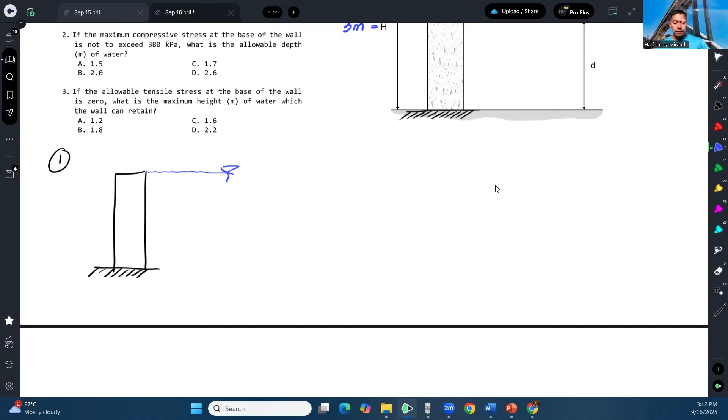Okay, and then we will assume a 1 meter strip of the wall, because typically the wall is long. So what we take is a 1 meter strip, which is the typical approach when analyzing retaining walls or dams.

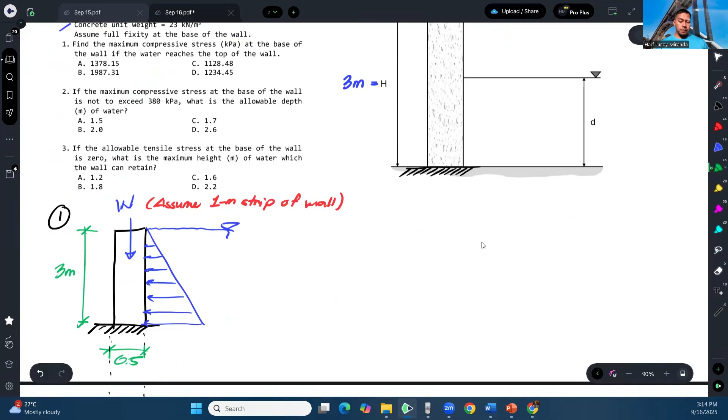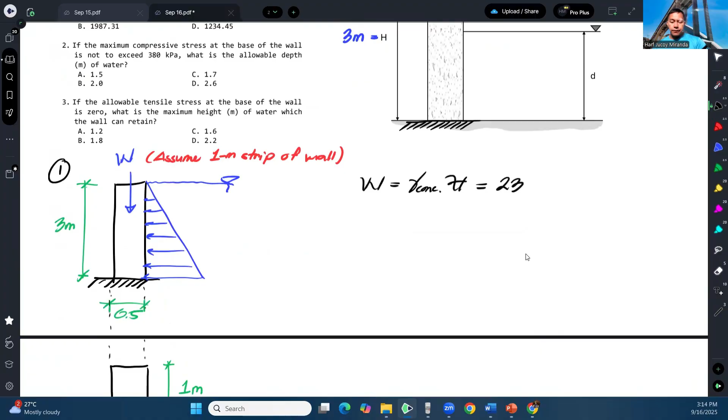So to compute the W, the weight, we're given gamma of concrete, right? So the weight, on the side here, is gamma of concrete times its volume, which is 23 times volume. So what is this volume?

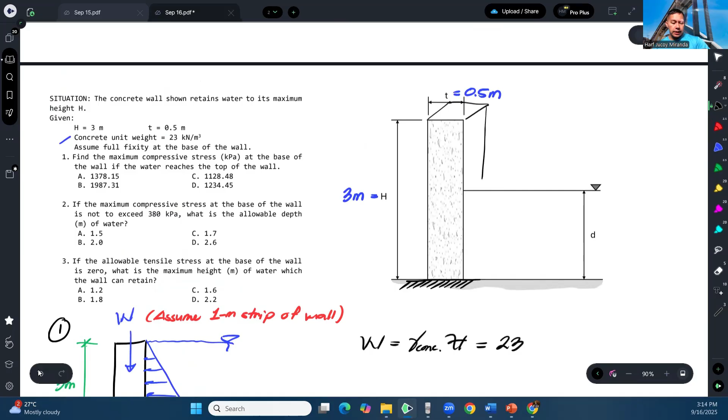It's simple actually, it's just like this: a solid rectangular shape, with a dimension here of 1 meter. So the volume is 3 by 0.5 by 1.

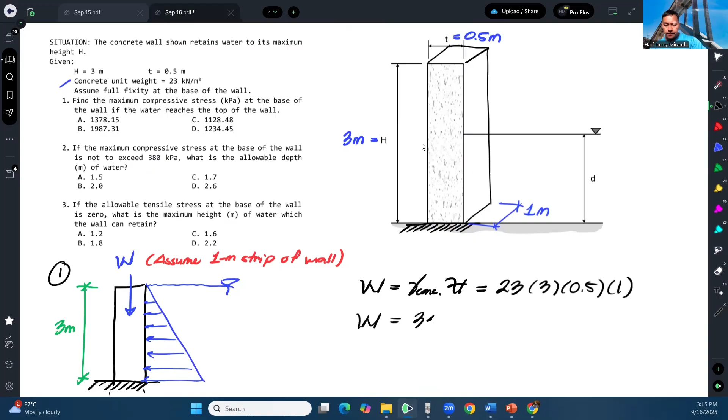That gives us 34.5 kilonewtons. As for the hydrostatic force, of course this has a resultant, which will be a function of the depth, right? Our depth now is 3 meters.

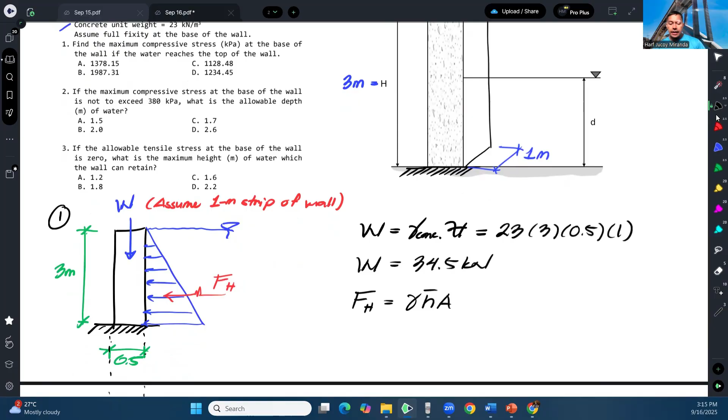So for our F, here you can use gamma water times H bar times A, or if you prefer, you can get the pressure at the bottom, which is just gamma times H, gamma times depth. In this case, H is the depth, and gamma of water is 9.81, with depth of 3 meters.

And then just get the area of the triangle. But if you want to do it this way, that's fine too. The gamma there is the gamma of water, and H bar is the distance to the centroid of the projection of the submerged shape, which in this case is rectangular.

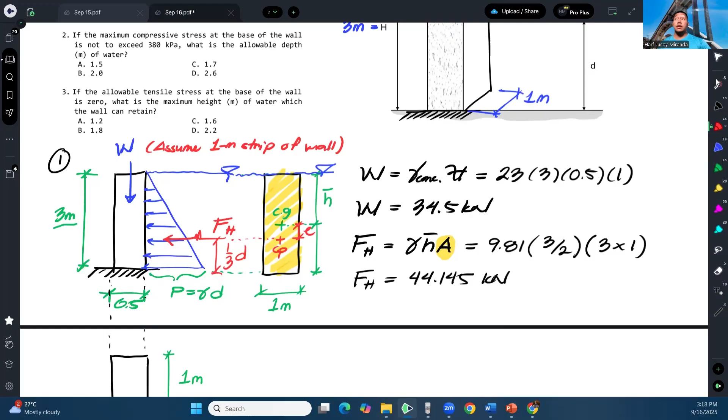So anyway, let's compute the question asked: compressive stress at the base of the wall. So again, let's go to the base, at the base. Let's say this is the base of the wall.

And as mentioned, fixed support.

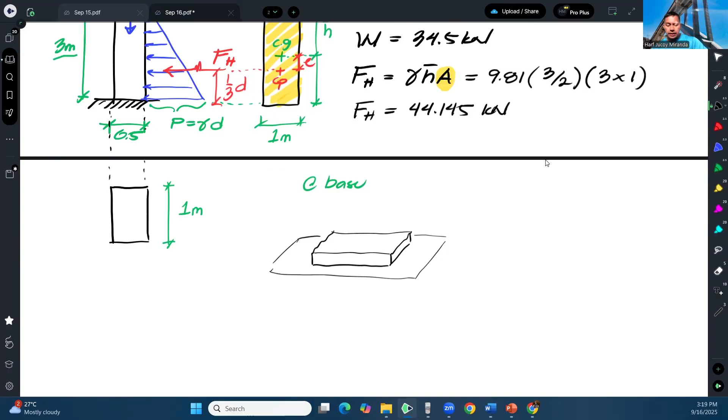Yan yung base. So because of the weight, meron dito reaction. And because of the force, meron din dito reaction. And maliban dyan, meron din ganitong reaction, kasi fixed support yan eh. So ito yung shear reaction, or wag ko lang gawing shear. Gawin ko lang to na Rx, tapos ito yung Ry, tapos ito moment reaction. Okay, so in this case, ito yun.

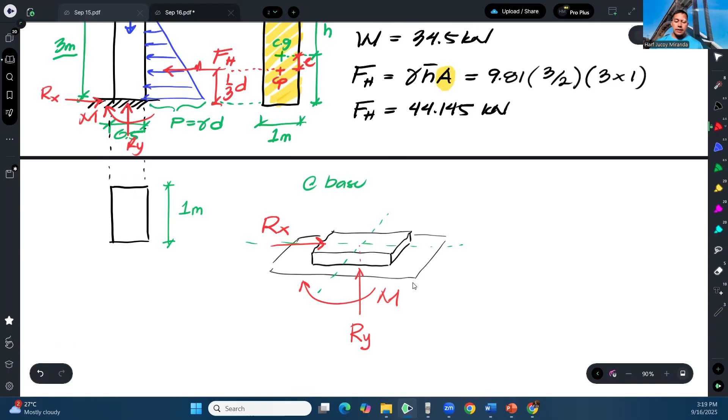Lagyan natin ng axis. Bali, meron tayong compressive reaction, Ry. Tapos meron din tayong moment reaction, M. And then meron tayong horizontal reaction, Rx. Okay, so ngayon, malinaw na in order for us to calculate the maximum compressive stress, combined axial and bending.

Ulit to. Okay, so ito will produce a compressive stress dun sa buong section na to. And ito namang bending moment will produce tension sa side na to, tapos will produce compression sa side na to. Kaya ang magiging itsura ng pressure diagram mo dyan, due to the combined axial and bending ay parang ganito.

So pwede na, again, pwede na ganito lang yan. Ibig sabihin dito sa dulo, compression pa din. Or pwede rin na bumaba siya dito. So ibig sabihin dito sa kabilang dulo, tension na siya.

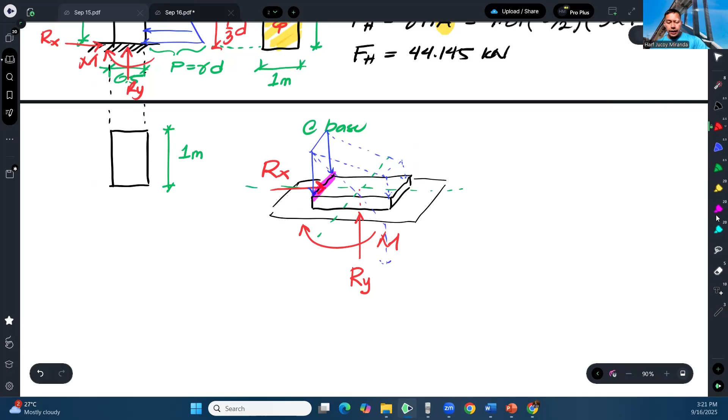Okay, and again, that's for us to determine. So ngayon, malinaw na yung maximum compressive stress ay magaganap dito sa corner na to. Okay, tawagin ko ulit yan na corner A. So that means na kumpitin na natin yung stress sa corner A.

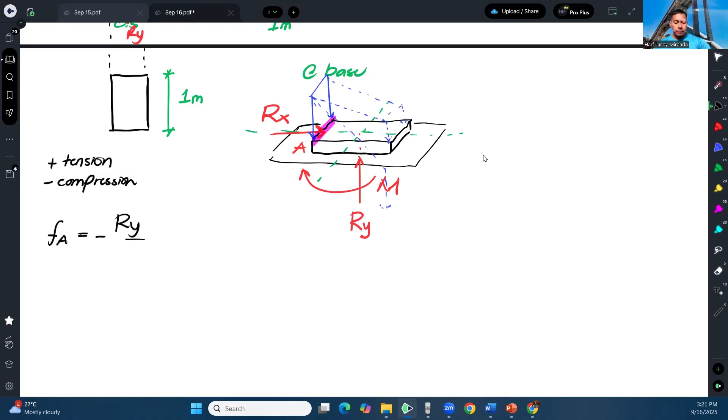So again, I'll assume positive yung tension and negative yung compression. Yung Ry will produce a compression. Okay, and then yung M will produce another compression. So MC over I.

I-define lang natin pala yung M. So yung M ay equal sa, so di ba moment reaction siya dito eh. So pag nag-moment ka sa base, ang kukontrahin lang nito, ito lang oh. Yan, so moment yan, no? So therefore M is equal to FH times yung moment arm na 1/3 ng D.

Okay, so dahil puno nga ng tubig, so yung FH natin ay 44.145 tapos yung 1/3 ng depth na 3. So it turns out na yung moment natin dito is just 44.145 kilonewton meter.

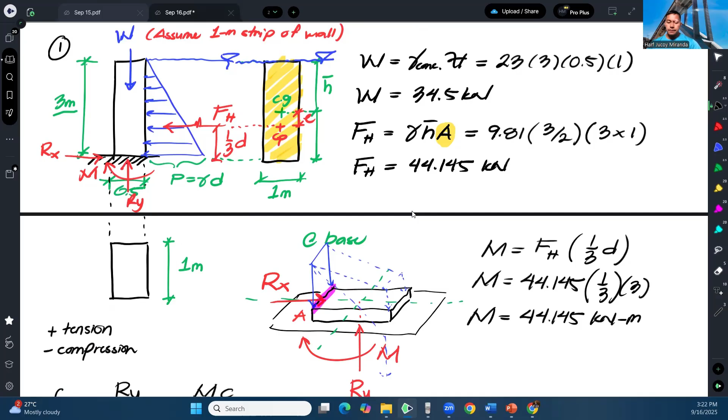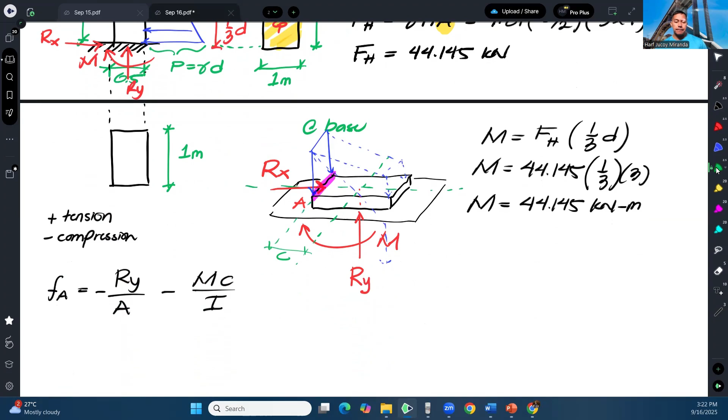Okay, tapos yung C natin, ito. Ito kasi neutral axis, yung C natin, ito. Yan, yun yung C natin. So, tapos yung I, BH cube over 12.

No? So bali, ito nga pala yung axis of bending natin, guys. So itong axis na to, lagyan ko lang ng kulay, ah. Itong axis na to, ito yan. Okay, so pag ganito yung bending moment natin. Ganyan.

Okay, so again, ito ay 1 meter. Ito ay 0.5. So yung I natin, ang naka-cube, ito, kasi ito yung axis of bending natin. Ang naka-cube, ito. So ang naka-cube ay yung 0.5. Ito. Alright, so isulat ko na.

And also, lastly, yung RY nga pala, pag nag-summation of forces Y tayo, ito pag nag-summation of moment tayo, ano, sa base. Pag nag-summation of forces naman tayo sa Y, lalabas lang na yung RY ay equal lang sa W, kasi wala namang ibang vertical load. So yung W natin ay 34.5. Okay, so we have FA is equal to negative RY, which is 34.5.

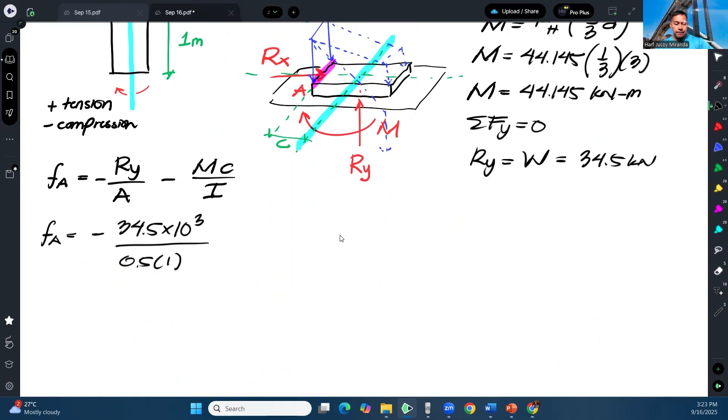Gawin nating Newton over area. So 0.5 by 1. Minus M, 44.145. Gawin nating Newton mm.

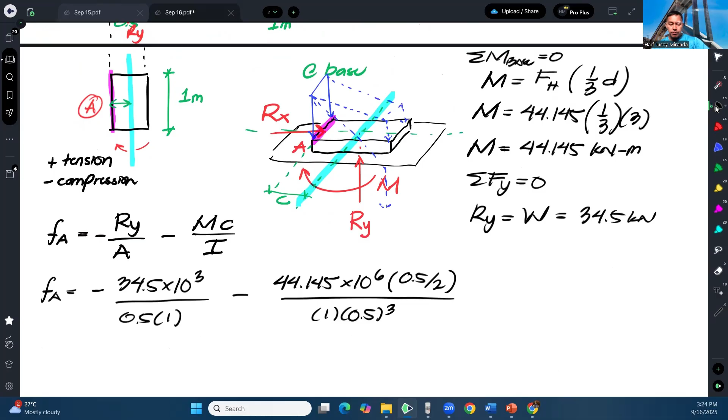Tapos yung C natin, ito yung pinag-uusapan natin na side eh. Ito yung A. So yung C natin, ito. Ito yung C natin, which is half lang ng 0.5, over I. So 1 times 0.5 cube over 12. So that is the maximum compressive stress.

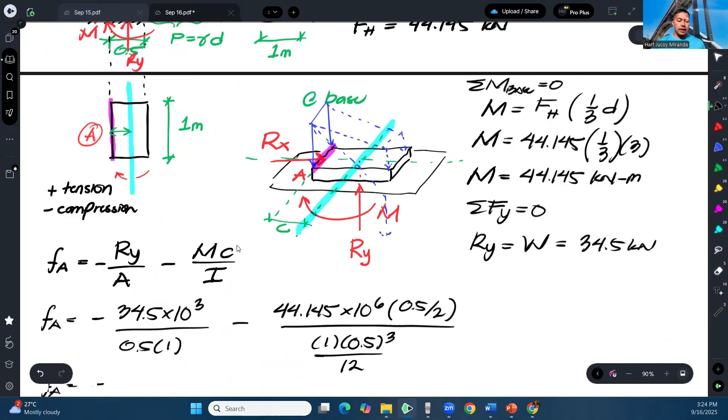Oo nga pala, ang sagot na kailangan natin dito, kilopascal nga pala. So para hindi na ako magko-convert, wag na natin to i-multiply ng 1,000 para kilopascal na kagad siya, kilonewton na siya, tapos naka-meter lahat. Ayan, so ganyan na lang. Sobrahin ko lang to.

So, that is the maximum compressive stress: 1,128.48 kilopascals. And that is our answer for number 1.

Okay? Next, if the maximum compressive stress at the base of the wall is not to exceed 380 kilopascal, what is the allowable depth of the water? So now for number 2, we're limiting the compressive stress to 380. So what is the depth?

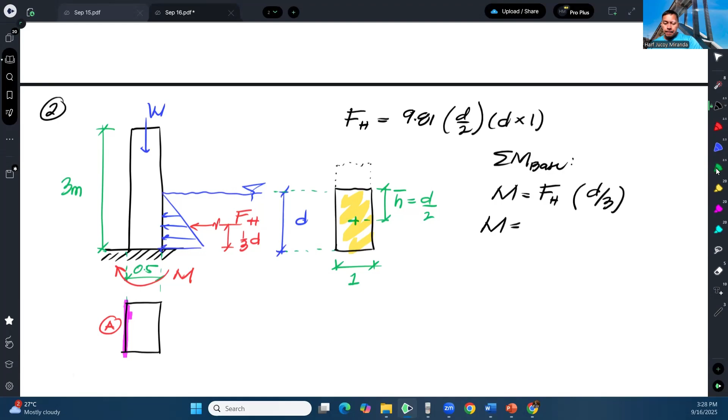Now, the moment reaction here is dependent on that FH. So when we sum moments at the base, we have M equal to FH times the moment arm, which is D over 3. So our moment becomes 9.81 times D over 2 times D times D over 3.

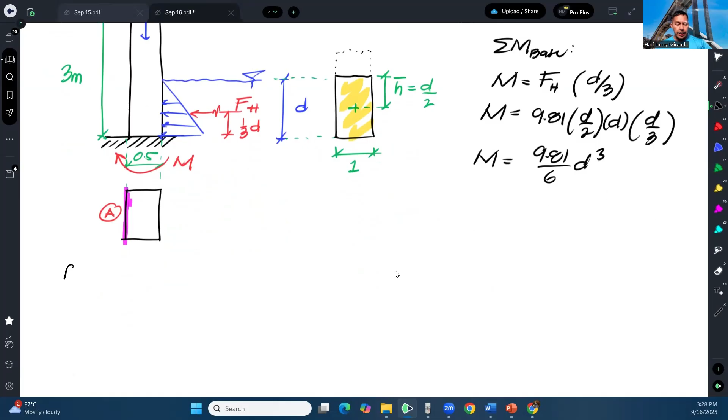Okay, let's repeat the stress at A. That is negative P or Ry over A minus MC over I. The FA here should not exceed the compressive stress of 380 kilopascal. So that's compressive stress. So negative 380. Negative 380 equals negative Ry, which equals the weight, 34.5, over area. Then the M, 9.81 over 6D cubed times C, 0.5 over 2, over I.

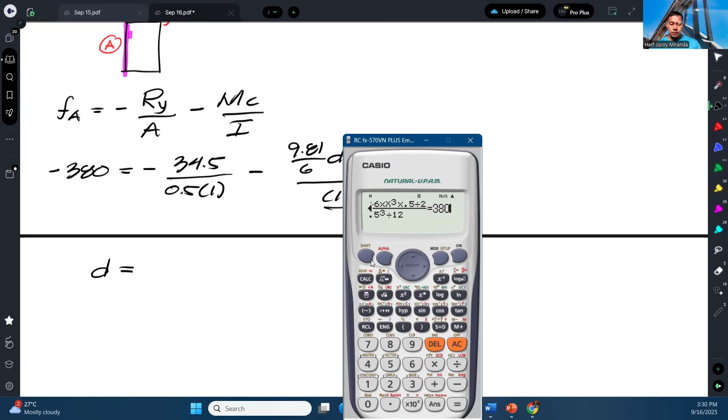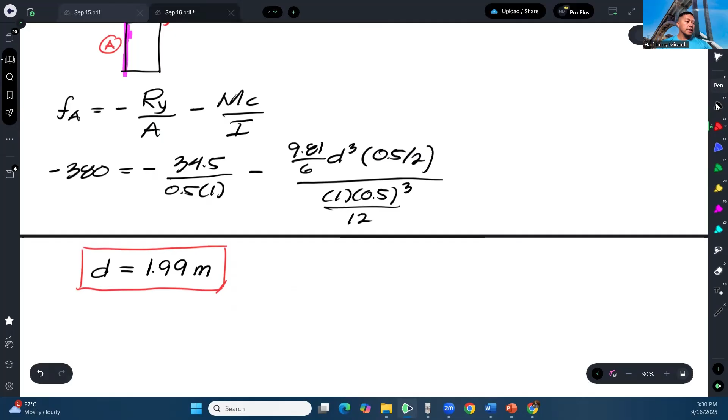So the depth is around 1.99 meters. That's the depth needed so it's safe and doesn't exceed 380 compressive stress. Among the choices, we'll choose the nearest, letter B.

And lastly, if the allowable tensile stress at the base of the wall is 0, what is the maximum height? So still asking for height, but now the tensile stress should be 0. So where would tensile stress occur here? It would occur on the other side.

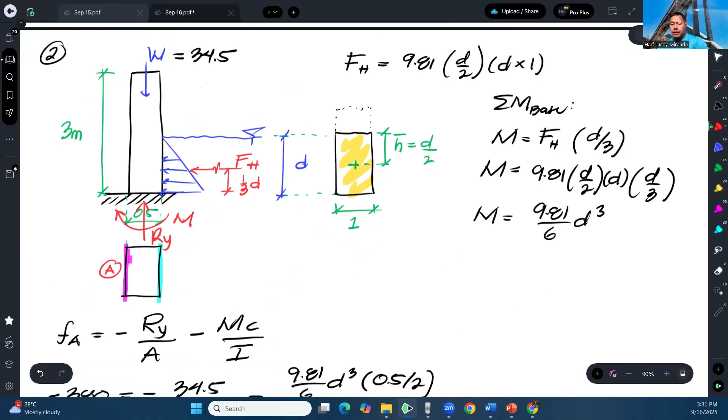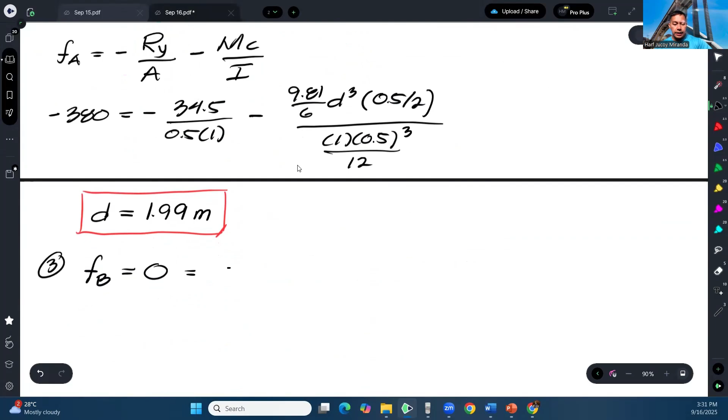So 0, right? Therefore, we still have it equal to negative Ry because Ry, even at B, is still compression. But the M now causes tension, so it's positive. So we have 0 equals 34.5 over 0.5 times 1 plus our M, same as before, since depth is still what's being asked. C, 0.5 over 2, over I.

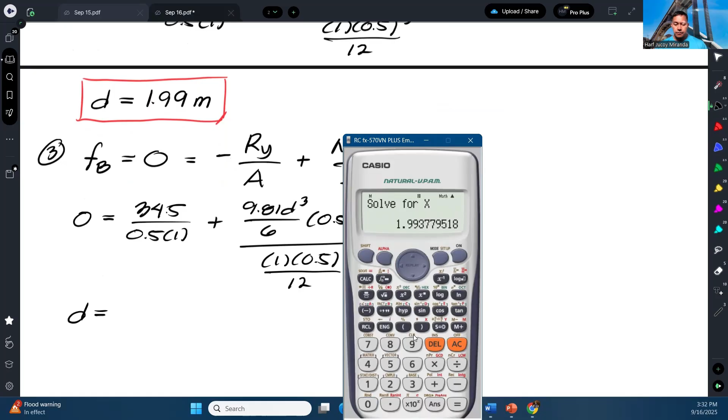From here, we should get that depth. What I'll do is make this negative, make the other side positive, then equate it to zero. That gives us around 1.21 meters.

And our answer for number 3 would be approximately letter E. And that's how we solve this problem.